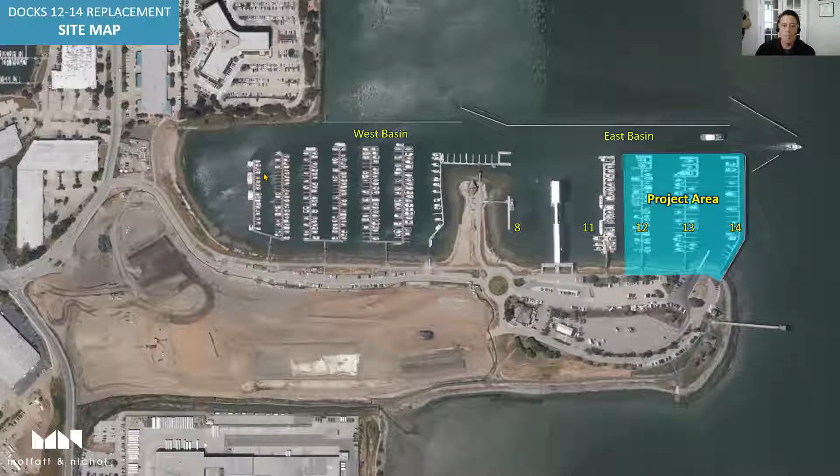I just wanted to start with what the project objectives were as we started and talked with the Harbor District. So these are the ones that I just want to focus on. There's other smaller ones or lesser important ones, but these are the main ones.

So first, we want to maintain the same dock footprint that we already have. And the reason for this is because the wave attenuators aren't going to leave. They're going to stay there. So we have a fixed area to work within the shoreline and the wave attenuators at 12, 13, and 14.

We wanted to accommodate wider vessels, wider beams, just because the trend in boats is to get a little bit wider, and we want to be well positioned to accommodate that in the future. Obviously, we want to upgrade our utilities just to get more modern and match what has been done recently at Dock 11.

We have side ties right now, or at least a side tie along Dock 11. You can kind of see it there in the background a little bit. But the Harbor District has wanted to look at the opportunity for another side tie. So we did look at a number of locations at 12, 13, and 14, and we'll get to the ones that we think are recommended in this presentation.

Certainly want to deal with high tides. The extreme tides that we see annually are the king tides. Happens at least once or twice a year, sometimes up to 4 or 5 times a year, just depending. But we do want to look at what's the 100-year event as well, and include that and an allowance for sea level rise in the future.

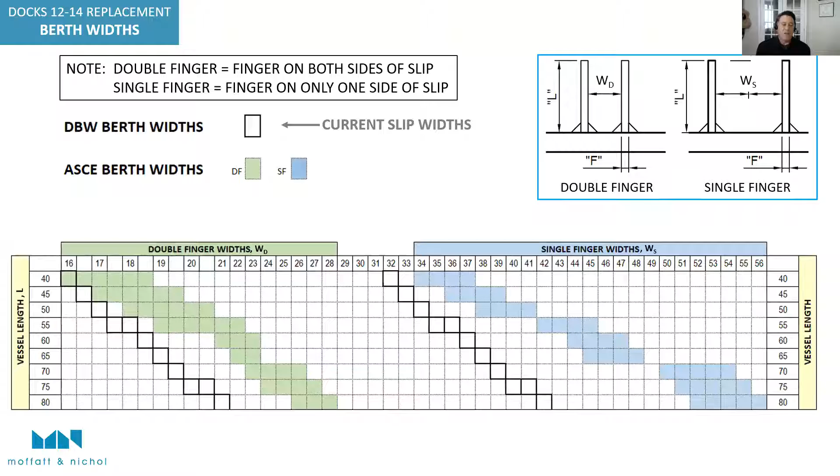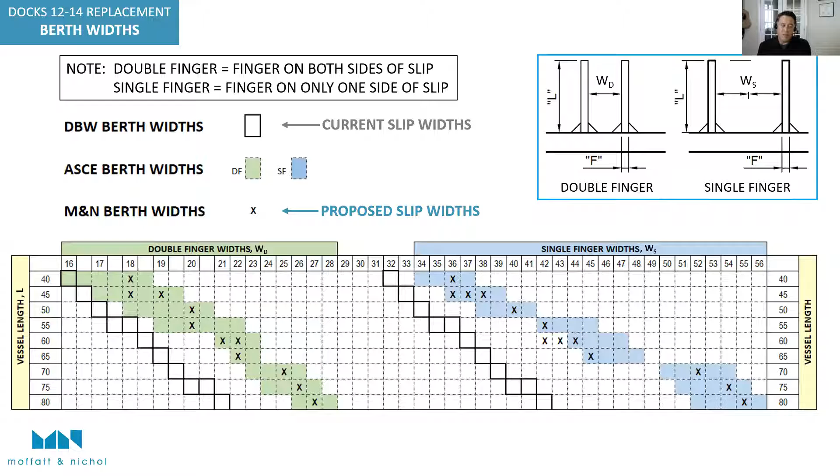So what we decided to do, and we talked about this with John and Jim, is shown in X's. Those are the widths that we think are appropriate. There is a range for some of them, just depending on how much space we have. But it generally falls closer to or within the ASCE guidelines. So quite a bit wider than what DBW requires and even what's out there right now.

So this is the layout of the existing facility right now. We color-coded the vessel slips by length, so you can kind of see the distribution throughout 12 through 14. The heavy border there shows what the project footprint will be. It includes the docks and the access onto land through those fixed piers.

So right now, we have 96 slips, varying from 36 up to 65 feet. And also want to point out that you can see the wave attenuators at the end of docks 12 through 14, and the slips that are part of those wave attenuators, those will remain. So it's only what's within this border. Neil, you might just explain to people exactly what a wave attenuator is real quick.

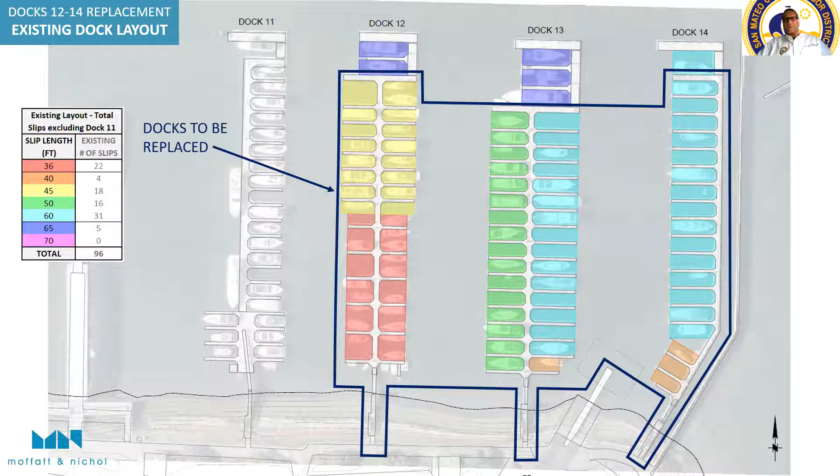Yeah, the wave attenuators were put in conjunction with the changes that were made for the ferry terminal. So back when the ferry terminal was proposed, the Corps of Engineers had to modify the outer breakwater, and they had to take some of the old breakwater out and modify it. So there was going to be more potential for wave activity inside the marina. So we looked at a number of ways to mitigate that.

And the best solution was to put these large, deep concrete floats, much deeper than what's necessary for a dock. And we put them at the ends of dock 11, 12, 13, 14. So they're wide, they're deep, and they absorb and block the waves that are coming in through the larger opening that was made to accommodate ferries. So you wouldn't really notice it out there. It just looks like a really big dock, but it goes very deep.

They're a little bit more than 5 feet draft. And they have a lot of piles to hold them in place because they're subjected to waves, and they take the brunt of the waves so that the rest of the marina is more calm. Is that good? Okay.

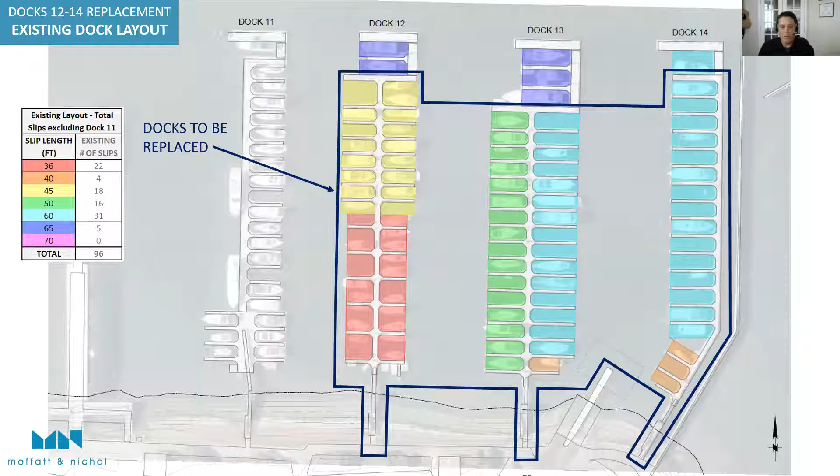Alternative 2 is very similar because the other best place to put it is on the east side of dock 13. This one's really good too. I don't think I've given this one enough credit, but this is a very simple, just mirror image of alternative 1. The opening between docks 13 and 14 is a little bit narrower, so that is maybe a con. But there also is a very nice wide fairway in this alternative. So there are benefits to it, and it has exact same slip counts.

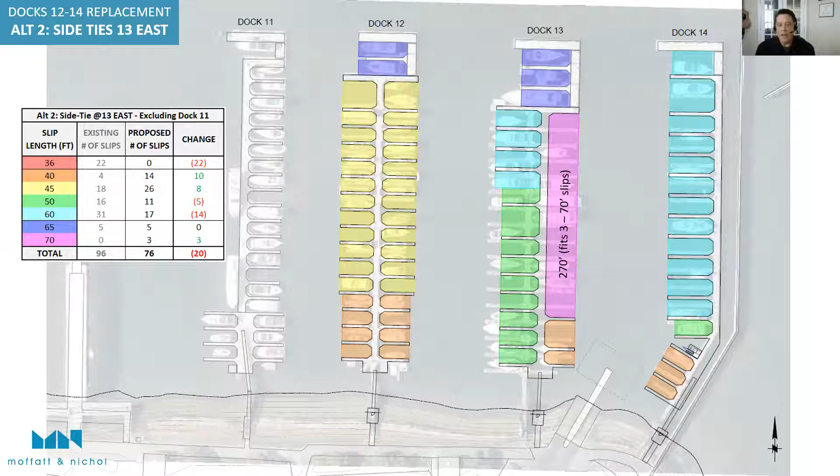So it's basically, I'll go back to this one. That's 13 west, 13 east. So very, very similar, and they're both, I think, very feasible. Also want to point out that in the elbow of dock 14, there's this little kayak facility that we're proposing, and I'll get to that in a little bit.

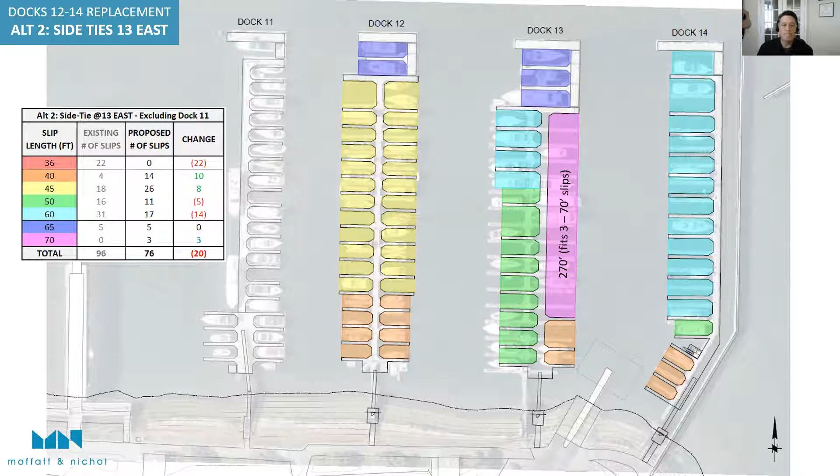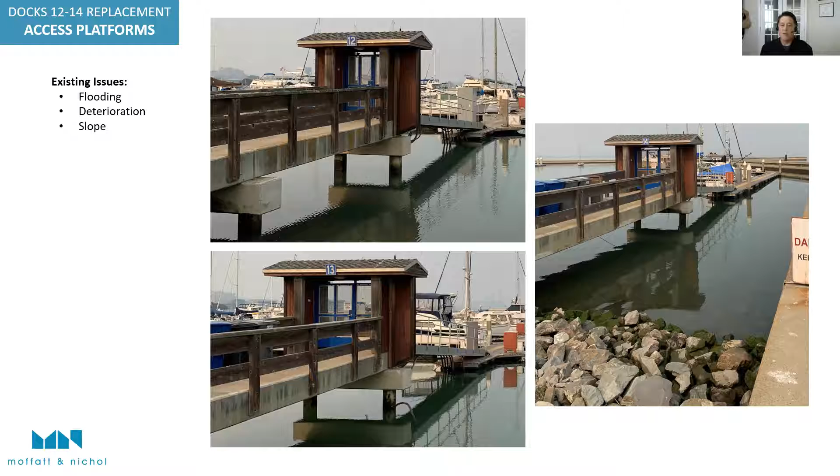Okay, we're going to be looking at replacing the access to the docks, obviously. Right now, we have some issues with flooding, primarily, or maybe worse, at dock 14. I think all of them are deteriorating just due to age. There's some concrete cracking that I think has been repaired at some point in the past. We also have slope issues with the shorter gangways than modern lengths. So all three of these things we would like to address with our proposed design.

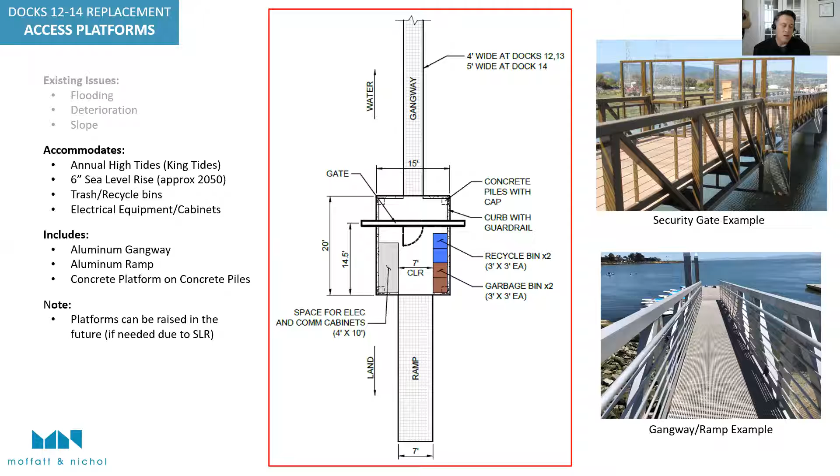So what we're trying to do here is accommodate the higher water levels. And one thing I would like to do is, in a sense, over-design this platform so that if we ever do need to raise it, we can just detach everything, raise it up, let's say 6 inches or something, and reattach it. And if we need to accommodate actual sea level rise as it occurs, we'd be able to do that. So that's something I'd like to accommodate.

And here's a side view of what the platform would look like. You see the gangway going down to the docks, hinged on the platform, and then a short gang plank going toward land, hinged on the platform as well. And what I'm trying to indicate here with the elevation set at 12.5, it's quite a bit higher than what the 100-year extreme water level event would be. Right now, that's approximately 10.7.

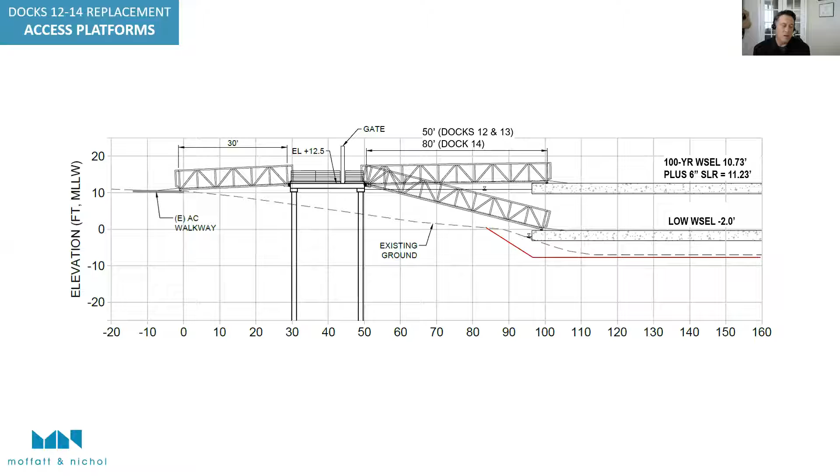And if you include 6 inches of sea level rise, we still have quite a bit of freeboard above that. And the reason why we're putting it that high is at that high water level, we're basically flat with the gangway. So it's not gonna be a problem with the gangway going uphill too much. It also allows future raising of land as we need to, so that the platform won't be at a low point.

For the kayak launch, this is a zoomed in view of the elbow of dock 14 in the upper right. Just a couple of things I want to point out. This is not going to be part of the concrete dock. This will probably be a vendor item. That's something we can just bring out and put into that kind of unusable area in the corner of dock 14. The three things I wanted to include in it are indicated by numbers 2, 3, and 4.

I want to have a sloped launch platform, so you're not floating in the water while you're getting in and out. I'd like it to be sloping, like a 10% slope, so you can get in and out while it's on the slope, and you just kind of pull yourself and slide out. To do that, you need overhead rails. Those are shown with number 3. It can be fully overhead, or it can be just off to the side.

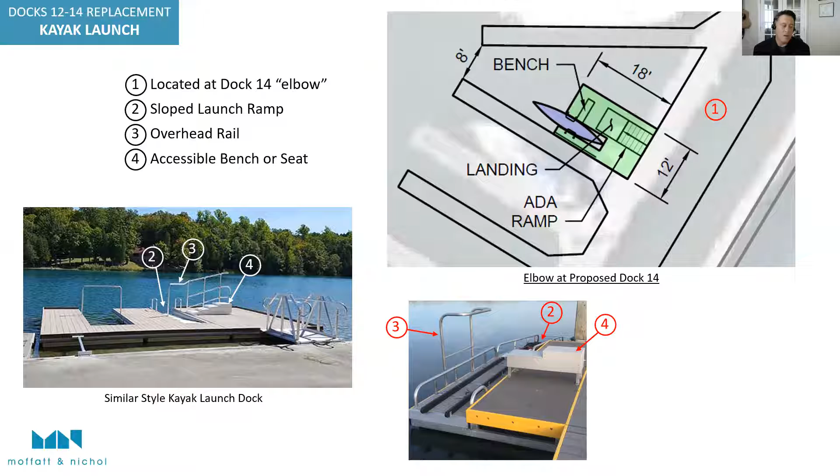And a lot of vendors are now providing accessible benches that are either fixed or extendable, so that you can get into the kayak. The example shown on the bottom right is from facilities in Bodega Bay where we had 2 of these recently put in, and the bench seat has a little extendable platform that you can go out on and then drop directly into your kayak.

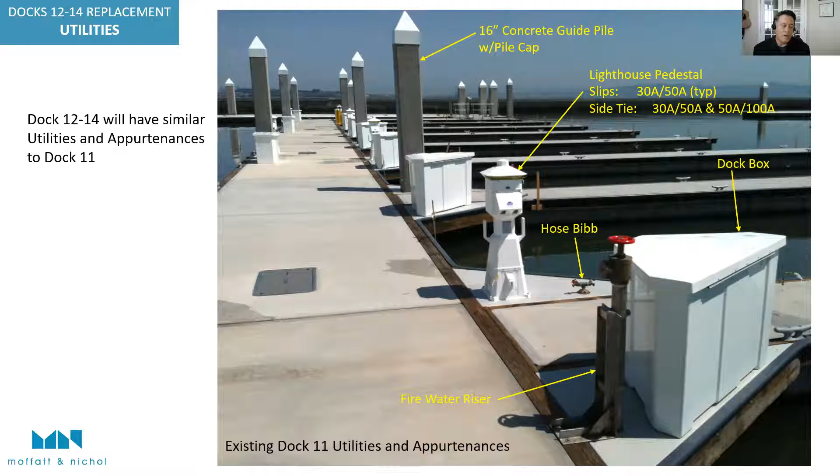Here's another picture of dock 11, just to give a visual of what we're planning at docks 12 to 14. Again, the concrete guide piles, these are larger. And in the knees will be dock boxes and utilities. We'll use the same pedestals, same type of hose bibb location and such. So this is just another way to show what it will look like at docks 12 to 14.

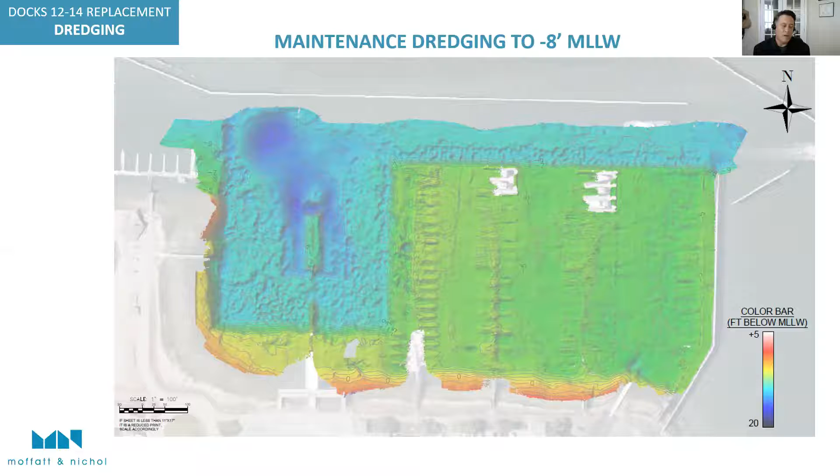As for dredging, we just did a bathymetric survey a few weeks ago, and you can clearly see the parts that are maintained by WETA for the ferry. Those are the aquas and blues. Those are deeper. They're authorized to a minus 10 foot mean lower low water elevation. The greens, yellows, reds, those are the shallower elevations. That's the part that we're dealing with. We were in the past authorized to minus 8, so 2 feet shallower.

And this next slide shows the depths at mean lower low water. So at low water, this is how much water you have. You see a number of 4s, 5s, 6s. Several feet need to be dredged out throughout, not just docks 12, 13, 14, but also 11 and the public guest dock at dock 8.

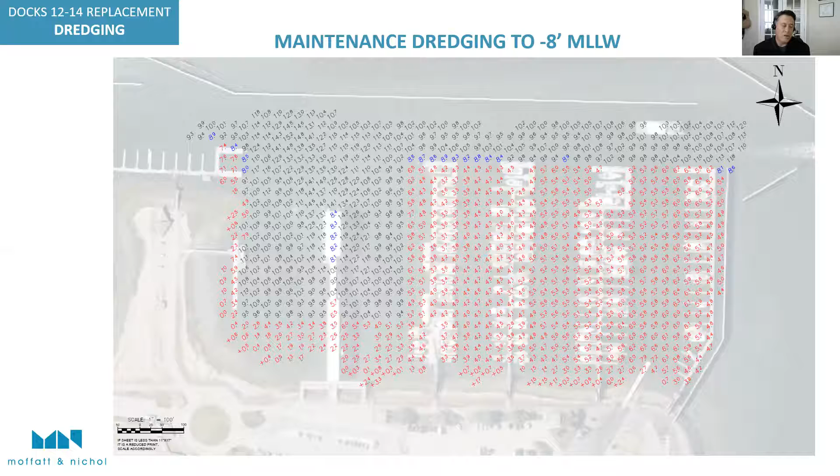So for dredging, I've been showing the minus 8, which is what's been done in the past for maintenance dredging. So that's one option. There's also the option of deepening to minus 10, which would match what the WETA ferry terminal folks have. So you could essentially dredge the whole East Basin to minus 10.

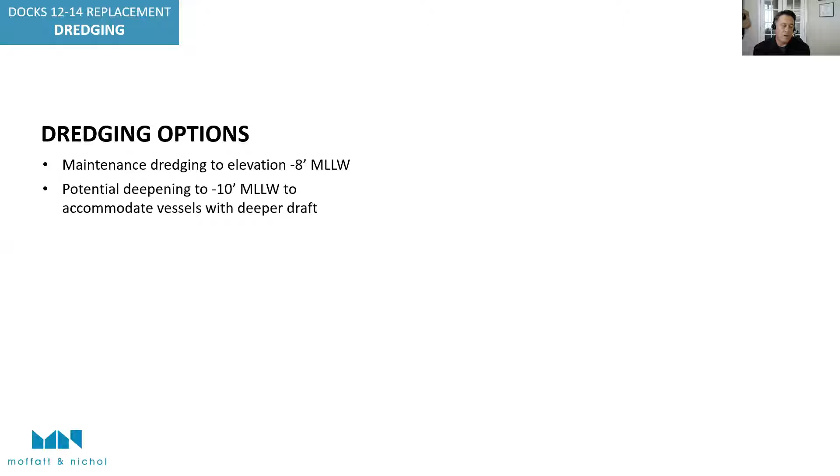Benefit of that is you can accommodate vessels with deeper draft. You can have more time before you have to dredge, and it wouldn't affect other vessels that have normal draft. So there are some benefits. There's a significant cost because you have more volume, and permitting costs as well. So this for maintenance dredging.

For maintenance dredging, we have about 59,000 would be the authorized permitted volume. You won't actually get that much because a dredger won't go get all the overdredge, so there'll probably be about 10,000 less than that. But that's what the authorized volume would be. For deepening, we get closer to 83,000. Again, probably 10,000 less than that would actually get dredged.

And the net difference is about 24,000 yards. So it's not a huge volume difference, but the benefit may be worth it. The extra cost for permitting is a one-time cost, and the cost for the volume disposal would just be every episode that you dredge.

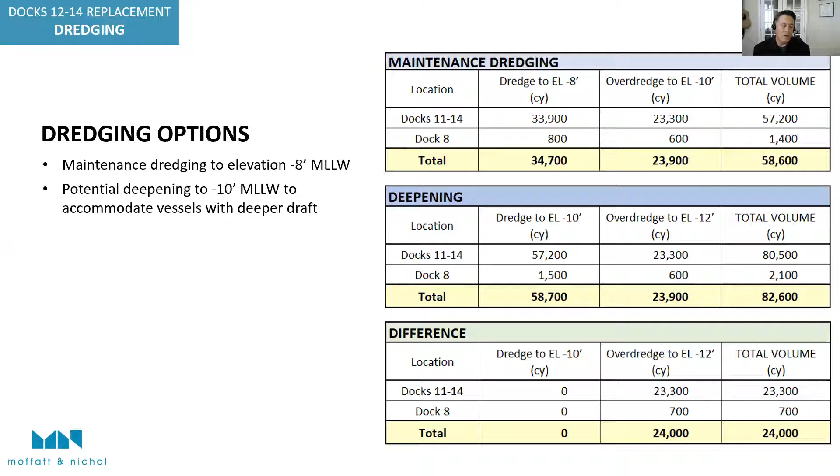So that's all I had for my presentation. So I can take any questions at this point. So thank you very much.

I'll jump in real quick just to expand a little bit on what Neil explained in the presentation. We have experienced a high demand on dock 11, our current only concrete dock that's out there, the one that's immediately east of the new ferry terminal that Moffatt and Nichol also worked with us on replacing. All of the docks in the East Basin, the docks 12, 13, and 14, just as dock 11, are over 30 years old, so do need to be replaced. And again, we've got a commitment with the City of South San Francisco to replace them,

and that's what we're moving forward with now. Dock 11, the concrete dock, has a waiting list, and largely we're trying to duplicate that with the double finger pier slips, which every boater loves, and we want to obviously increase demand. The rest of our marina is between 65 and 70% occupied, whereas, like I say, dock 11 is 100% occupied, and we have a wait list. So the demand for slips very similar to the concrete docks on dock 11, and we have a great demand for the side ties that we have at dock 11.